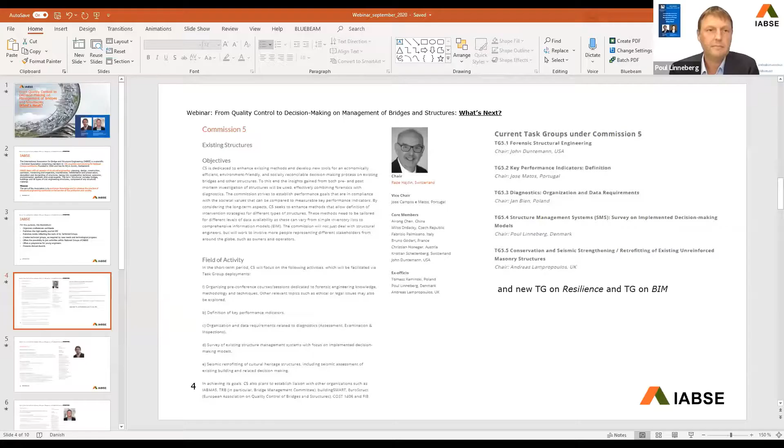So a few words about IABSE. It's an international association for bridge and structural engineering. It's a scientific and technical association comprising 100 countries and counting 56 national groups worldwide. It was founded in 1929 and has its headquarters in Zurich, Switzerland. IABSE deals with all aspects of structural engineering: planning, designing, construction, operation and monitoring, inspection, maintenance, rehabilitation and preservation, demolition and dismantling of structures, taking into consideration the technical, economical, environmental, aesthetic, and social aspects.

So it is the last items that we will talk about here today, about the management of bridges and structures. IABSE defines structures to include bridges, buildings, and all types of civil engineering structures. I'm sure Jose will also touch upon that in his presentation. IABSE's mission is to exchange knowledge and advance the practice of structural engineering worldwide, in the service of the profession and society.

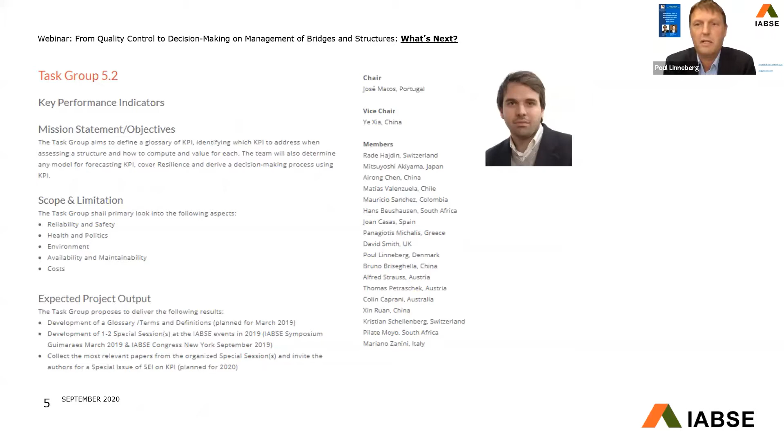José Matos will for sure give us a good introduction to this.

Then there's the fourth task group on the structural management system, where we do a survey on implemented best practice and also on promising research, and we will try to address if there's a gap and how to progress the industry from the latest knowledge within structural management systems and decision-making models. Then there's the fifth task group, on seismic strengthening and retrofitting of existing unreinforced masonry structures, headed by Andreas Lampropoulos.

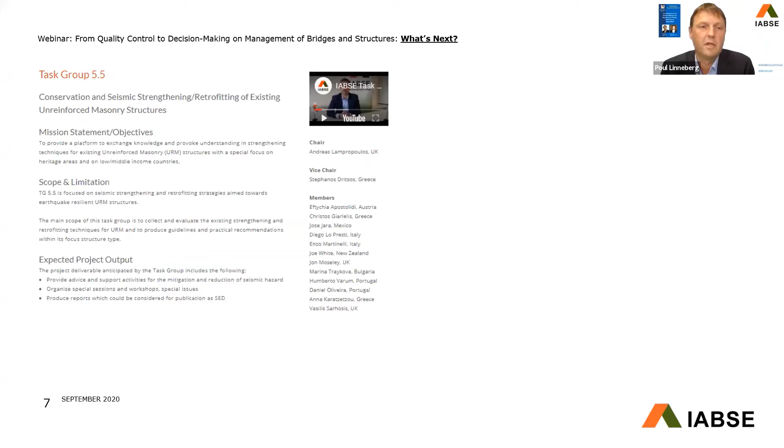He has made the first IABSE webinar, which is available on the IABSE webpage, in a section called e-learning, where you will see a great presentation with a Q&A session afterwards, where you can learn a lot about this subject.

Now today's speaker is Mr. José Matos from Portugal. I'll just give a brief bio of him. He received his PhD in civil engineering in 2013 in the field of probabilistic-based safety assessment of existing structures.

He has been teaching and supervising master's students and PhDs since 2007 at the School of Engineering at the University of Minho. He is a member of ISISE, the Institute for Sustainability and Innovation in Structural Engineering. His research fields are bridge engineering, asset management systems, life cycle cost, safety assessment, risk evaluation, and sustainability.

I guess all of our participants at today's webinar can see that these items are of interest to us. He is also a co-author of more than 100 publications in international conferences and journals. He participates in several international committees and coordinates international working groups. He is also involved in coordinating several international and national research and development funded projects.

He has been chair of COST Action TU1406 on quality control plans for roadway bridges, standardization at a European level, which has recently been completed. More recently, he was elected president of Eurostruct and is a vice president of IABSE.

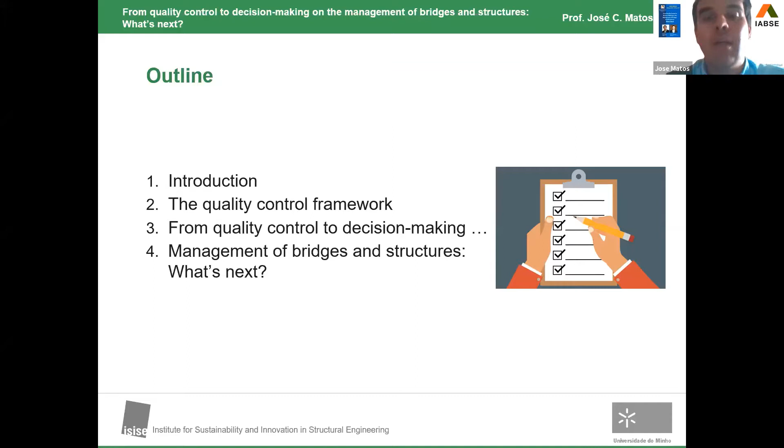So in engineering, quality control is related to systems development in order to ensure that the products or services meet or exceed the expectations and needs of users and the community. This is the definition of quality control.

And when we go to bridges and structures, we must say that asset management, which all of you are aware of, and quality control are two sides of the same coin. However, there is an increasing need to develop strategies in order to ensure the quality of the entire system, with the aim of reducing the risk of unexpected costs.

So that's the reason why we want to do better quality control, and in line with that, more efficient asset management.

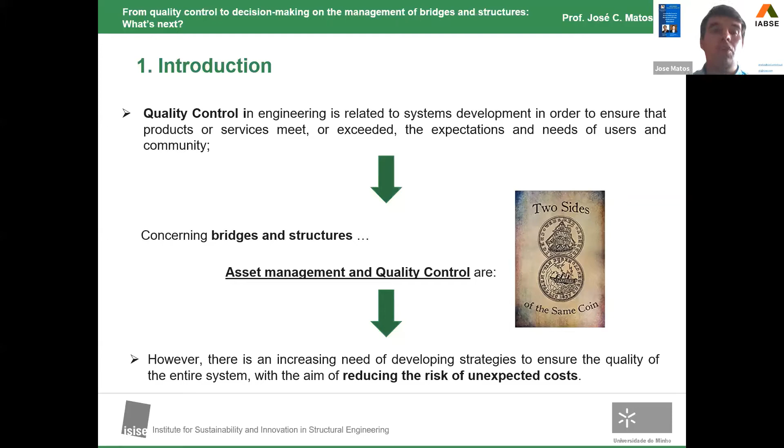We know today that many bridges and structures are approaching the end of their lifetime, and this makes these bridges and structures critical assets in order to ensure the mobility of people and goods. We all know, for instance, the situation of the bridge in Genoa, where the costs of the collapse were not just the direct costs of the collapse.

But also the cost of the impact on the economy and on the society during the period the bridge was unavailable for everybody. Also, some structures show a faster deterioration process, mainly due to poor design and construction, where the quality check during design and construction was not so good. These structures show faster deterioration, and this process is accelerated by external factors such as increased traffic loads, or natural or man-made hazards that our infrastructures face today.

So we need to establish maintenance actions in order to make those structures more efficient and with higher performance, at least during a longer period of time. And in order to do that, we need to take efficient decisions based on an optimized plan of interventions, and such interventions should be made in order to keep the structures as functional as possible.

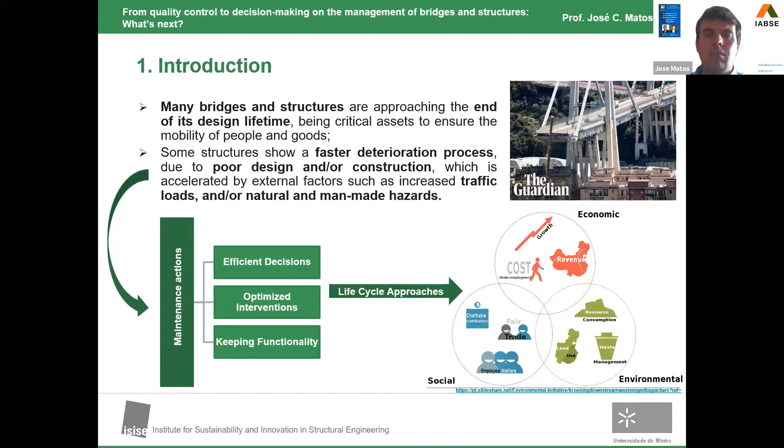So this enters into what we call the life cycle approach. In life cycle approaches, we need to take into account the economy of costs - the costs from the operation and use of these infrastructures. The social costs, because we have an impact due to the availability of the infrastructure on people and society, and also the environmental cost, which is something more recent, but we need to take this more and more into account.

So the definition of a holistic and integrated approach for life cycle management of bridges and structures becomes crucial. This approach should take into consideration condition inspection and monitoring, a good performance assessment and modeling, the interventions we need to implement, and also the standardization of best practices on the maintenance and management of those structures. Thus, there is a need for harmonization of different standards and codes into the definition of new guidelines for lifetime extension.

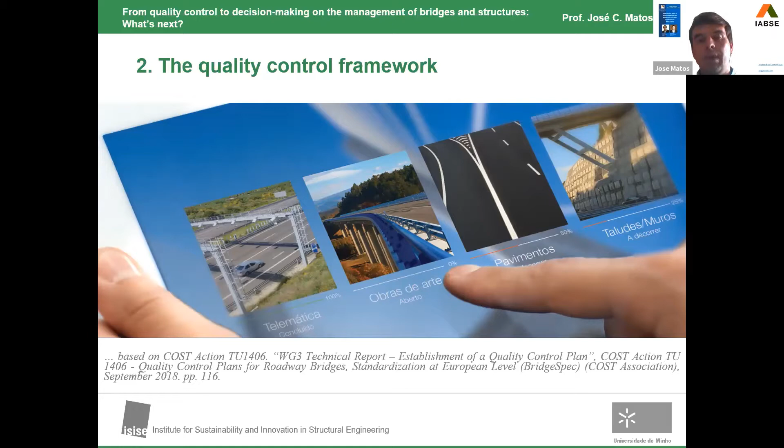Now, I'm going to give you an overview of what is a quality control framework that was decided and discussed within COST Action 1406, a cost action that was chaired by myself, but with collaboration from colleagues from all over Europe. You can go to the website of this action, and there you're going to have much more information about the framework and the quality control framework that we developed and proposed during this action.

So as I said, we know that we need to assess bridges. This assessment is mostly made through visual inspection procedures. We all know that. In some occasions, we use NDT tests, and in some specific situations, we can implement monitoring systems, permanent or temporary. The good thing is that all of these give us an indicator of the performance of our bridges, of our infrastructures, during their lifetime.

Of course, most of these indicators are visual based, so very subjective and depending on the technician doing the inspection. But more and more we are starting to have indicators which are more objective and based on or obtained through more efficient techniques such as NDT or monitoring.

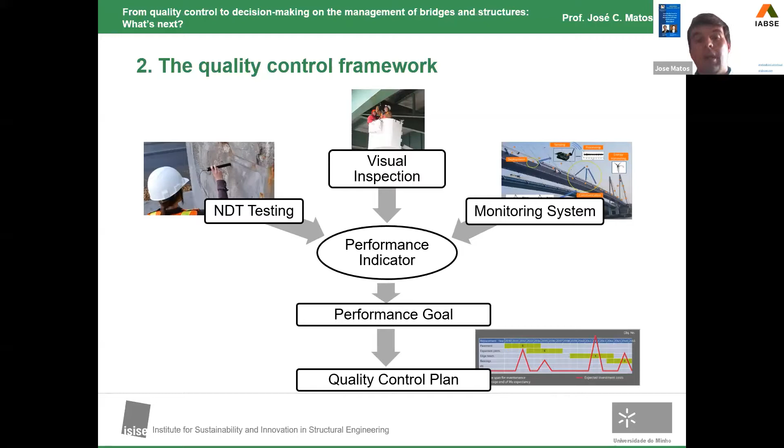Then, based on these indicators, we need to check if the infrastructure, if the bridge, is accomplishing or not the goals for which it was designed - so it is or it is not. This checking, whether it is or isn't accomplishing the goals, is made through a quality control plan, and this checking should be developed during the whole lifetime of the bridge.

So what is a performance indicator? This is a very important definition because performance indicator is the base of everything. It's something that you can measure or quantify, a parameter related in this case to the bridge performance, but it can be related to any kind of structure performance, that can be compared with a target measure or a performance goal, or can be used also for ranking purposes.

If we have a stock of bridges or similar structures, we can establish ranking and take decisions based on performance indicators. This is done under a quality control plan or a life cycle management procedure.

So you have here in this image below an explanation of performance indicators that we may obtain for each bridge, for each structure, and also a connection between these indicators and the goals that we want to achieve for each bridge.

The goals should be to minimize the owner cost, minimize the user delay costs, or in other words maximize the availability of our bridge, minimize the environmental costs and impact, and keep our bridge and our network safe for the users and reliable as it is.

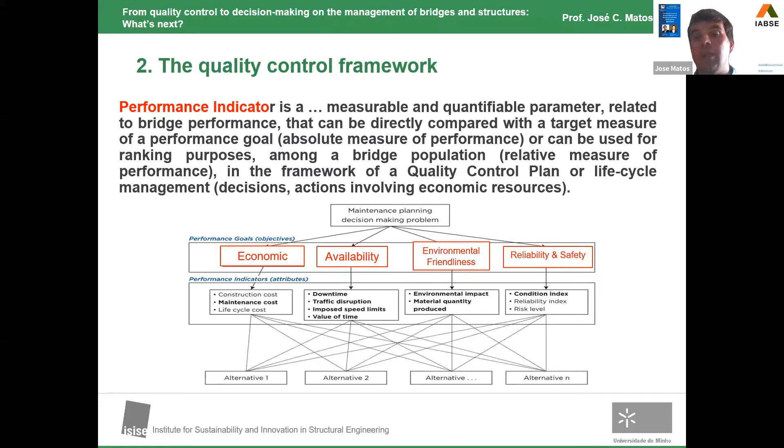We identified economic, availability, environmental friendliness, and reliability and safety as the most important ones in this case for bridge structures. These are the KPIs, the key performance indicators that came from the Dutch RAMSSHEEP approach.

And we decided during this cost action, as I told before, that for bridges those key performance indicators indicated in red color are those that are really relevant for the decision-making procedure.

And those that are in red color include the reliability. When we speak about reliability, I believe all of you are aware, at least those from the structural engineering side, that reliability is directly related with the safety or the serviceability of the structure. So it's something directly connected to the structure itself.

Then we have the availability. The availability is connected to the operation of this structure, how this bridge is available or not to the traffic. Is it in operation for the users or not? This is the concept of the availability KPI.

Economic, we all know what is economic. It's the costs that we have with interventions and the maintenance of our bridges. These are the economics KPI.

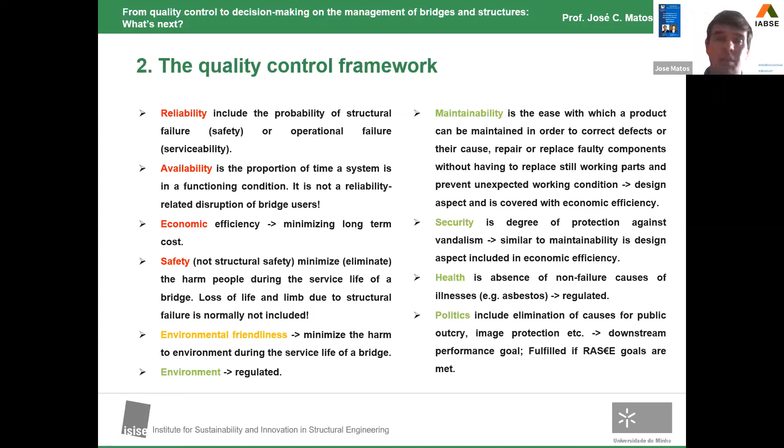So we kept these four KPIs that will allow us to take decisions on the best alternatives, the best scenarios for interventions on our bridge stock: reliability, availability, safety, and economics.

And we can split these KPIs into two big groups. The first one is what we call static quality control, or snapshot. Why do we put reliability and safety there? Because if we go today to any bridge, we can evaluate the reliability of the bridge in terms of safety or serviceability and ultimate limit states.

So we define the performance limit states and we can evaluate and assess the reliability today, and also we can assess the safety of the bridge today to the users. This is something you can do today if you go to any bridge site.

Other KPIs we group as the dynamic quality control, because costs and availability depend on two things: the forecasts of reliability and safety, connected with the degradation or deterioration model we implement to do these forecasts, and also the strategies of interventions we want to implement on our bridges. Some strategies will have higher costs or higher availability, others will have less costs or less availability.

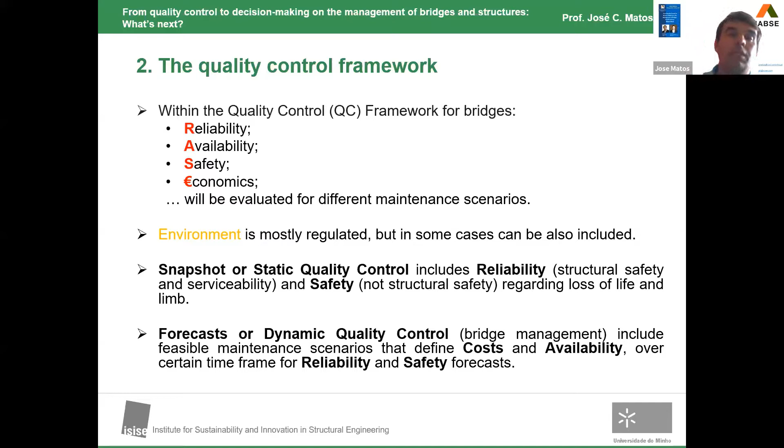With this quality control framework, we can connect the damage process governing the deterioration of our bridges with the performance indicators that give us information about the bridge's performance. This comes from observations directly on the bridge, but also from other data. Once you have this indicator, we have a value obtained with visual inspection, NDT, or monitoring, and we can connect this value with the KPIs.

In this case, safety, reliability, availability, and costs are the KPIs that will allow us to make decisions. So we can get these values for each element of the bridge, for each bridge type - girder, arch, or frame bridge - and for each level of analysis, whether a component like a bearing device, a bridge system, or a network of bridges. This is somehow the procedure I explained before.

So we split the KPIs into two levels, the reliability and safety KPIs, then we assess the bridge and calculate these two KPIs. Based on the scenarios we have, we can target different KPIs in terms of availability and costs, but also project reliability and safety over time. So we have a multi-criteria, multi-objective decision-making process where we want to check the optimal scenario in terms of interventions, taking into account the lifetime of the bridge or period of analysis, and the KPIs: reliability, availability, economy, and safety.

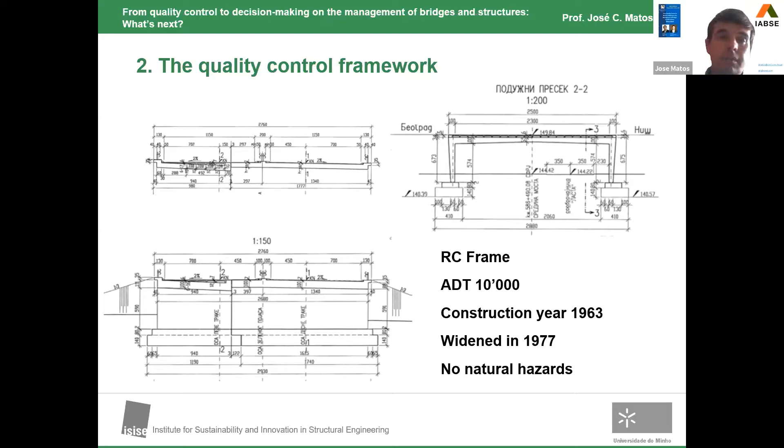This bridge was built in 1963 and later widened in 1977. From the design checks and information, there was no particular weakness identified in the design, so no human errors. There is an obvious weakness on the connection between the old and new part of the bridge, and no identified problem on the materials. There was indeed an identified increase in traffic demand from 63 to 77.

That's the reason why we recalculate what we call the prior or virgin reliability index, which is the reliability index of the bridge without any damage. We recalculate it for the new traffic load, and the value we got was 3.8.

Also, in order to do that, we need to identify the governing collapse mechanism - the two main mechanisms that can put the bridge into collapse in terms of ultimate limit state. We identify a bending and a shear collapse mechanism, and consequently we identify what we call the vulnerable zones, or the zones critical for this bridge.

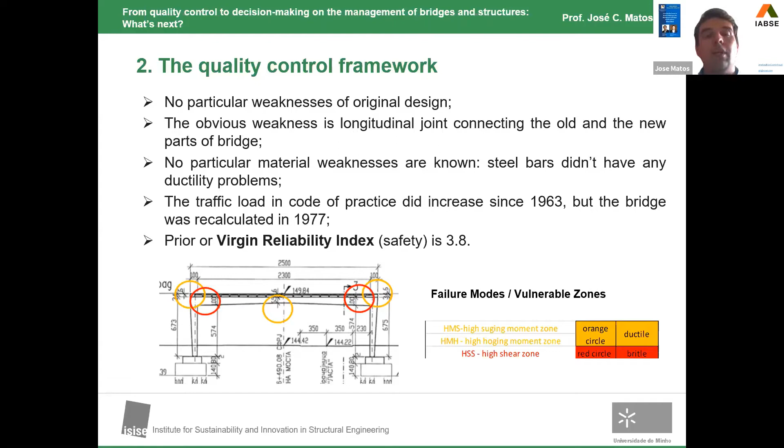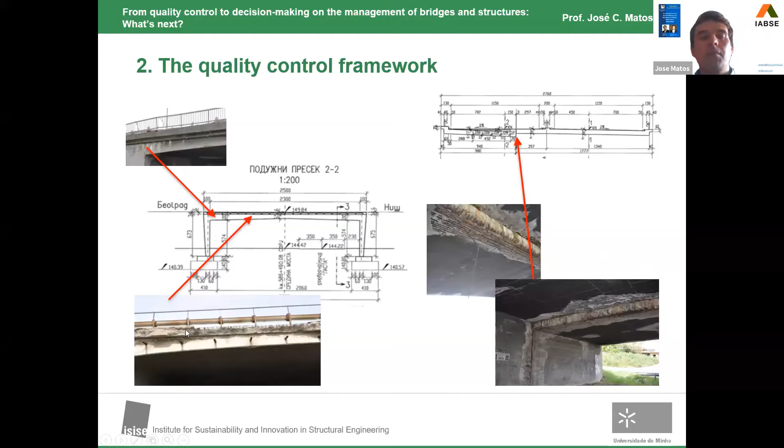So after analyzing the drawings, we came to the bridge inspection and identified some pathologies along with the location where these pathologies were checked. We are speaking about diagonal cracks in an abutment, some corrosion in the conjunction area between the old and new part of the bridge, and some spalling and corrosion in the deck.

According to the information from the inspection: spalling at a width of 1.5 meters over the whole span, some significant corrosion on the old structure, some corrosion in the new structure but in the vulnerable zones, probably some corrosion over the piers based not on what we see but on symptoms we get from the inspection, and also this diagonal crack due to shear.

This is the sketch that we get from the inspection that we made from the bridge. Based on experience and some elementary statics, we may say that a resistance reduction of around 10%, probably due to this significant corrosion that was identified, is happening.

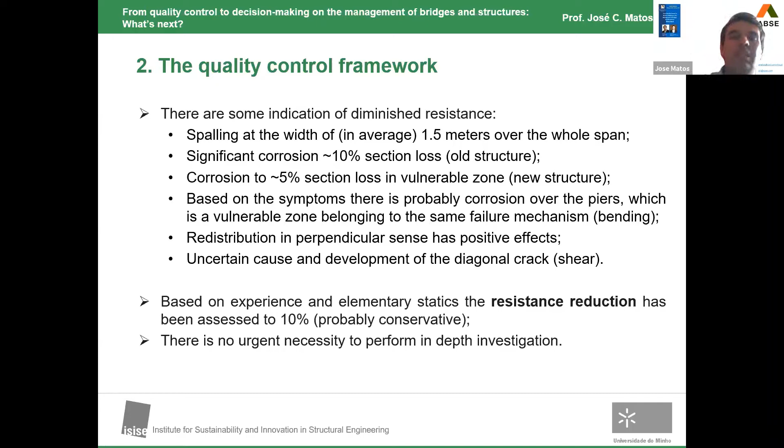So we can also establish different scales for reliability, in terms of ultimate or serviceability limit states. This scale is from 1 to 5. 1 means that the bridge is in a very good shape and 5 is a very bad shape.

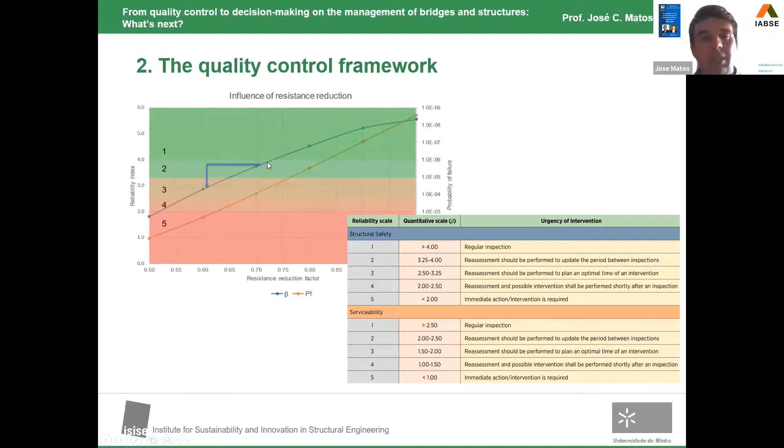Since here we are speaking on ultimate limit states, we can use this first scale, based on the collapse mechanism of the bridge. Based on these values given to us from the codes, from Eurocode and others, we can establish these 5 scales. Based on these 5 scales, we may say that initially our reliability was of 2, and then after this resistance reduction, we get a reliability KPI of 3.

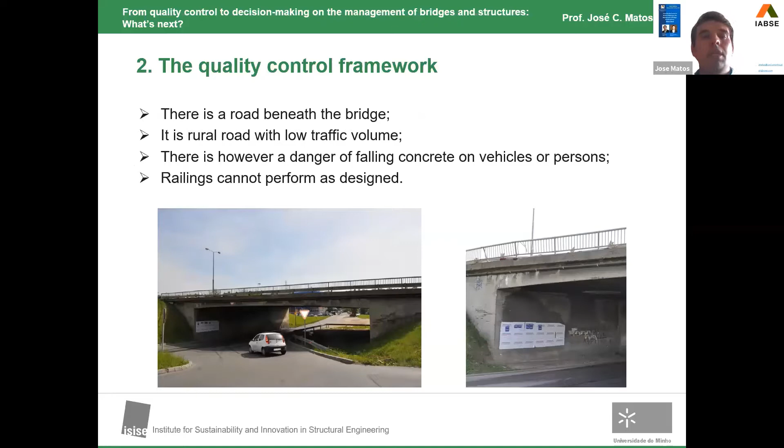We can evaluate also on the same inspection the safety KPI of the bridge, and in this case, based on what we saw, there was some cover that could have an impact on vehicles, but the probability of large chunks falling down is not so high. Although we identified that this can happen due to spalling, there was also some damaged railings that could jeopardize traffic safety.

Based on that, we also took these tables into consideration from 1 to 5, and we give a KPI value for the safety KPI of 2, which means injury return period of 75 years, or in other words, that it's very unlikely that a person could get injured because of current bridge performance.

So then we can pick this framework that I already showed you before, and based on this framework, we can establish the bridge type. We can pick the bridge element that we are analyzing, take the information about what material this element is made of, the year of construction, and the collapse mechanism connected to each element.

So if it is a bending or a shear collapse mechanism, which are the 2 main mechanisms in terms of ultimate limit states, and then in terms of safety KPI, we can evaluate the falling of chunks from the deck or the damage on the railings.

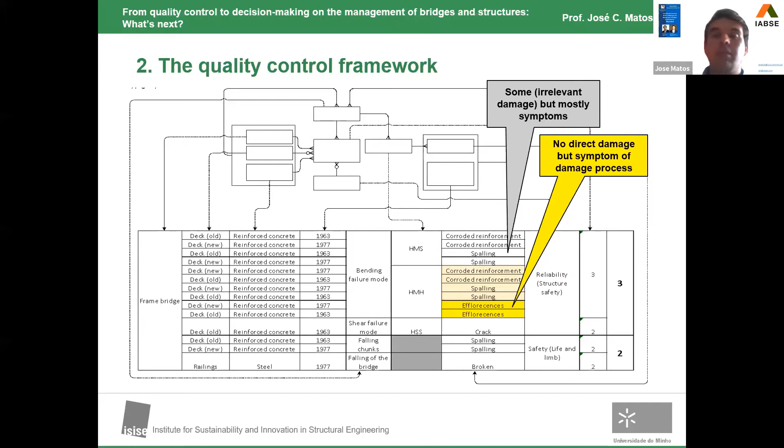And the same for the safety: we evaluate the spalling and the broken railings, the 2 situations. 2 is the worst one, so we took 2 for the safety KPI.

But we need also to address later the component of time. Time is a projection based on the material degradation durability. And we can do this projection for 15 years or more, which is the number of years that the reliability KPI or the safety KPI will be maintained at 3 or at 2.

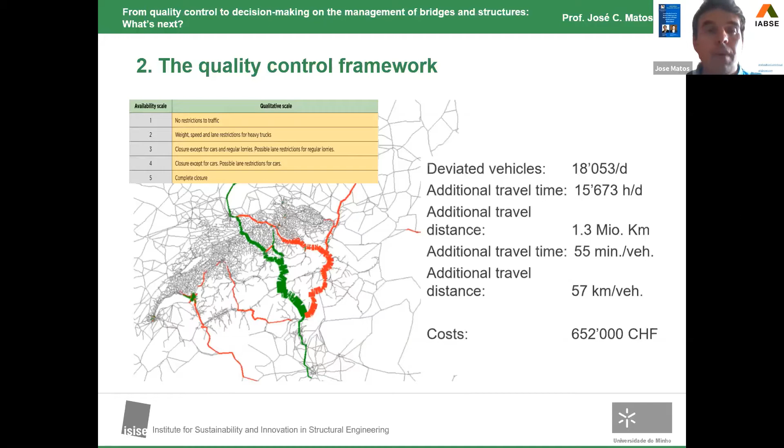In terms of economic and availability, these are the other 2 KPIs that we need to take into consideration in the quality control framework, based on the scenarios that we need to address. We can classify the availability from 1 to 5 according to these tables, and the same for the costs. All classical bridge management systems have this cost information: unit costs, mobilization costs, and maintenance intervention costs. So all this information is there, and based on that, we can calculate the costs.

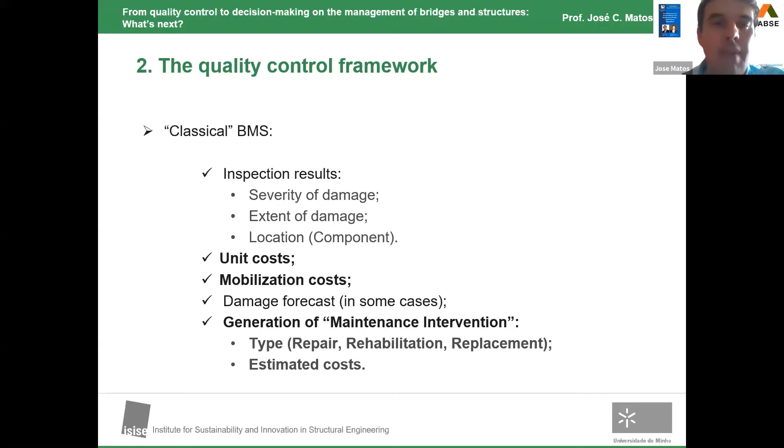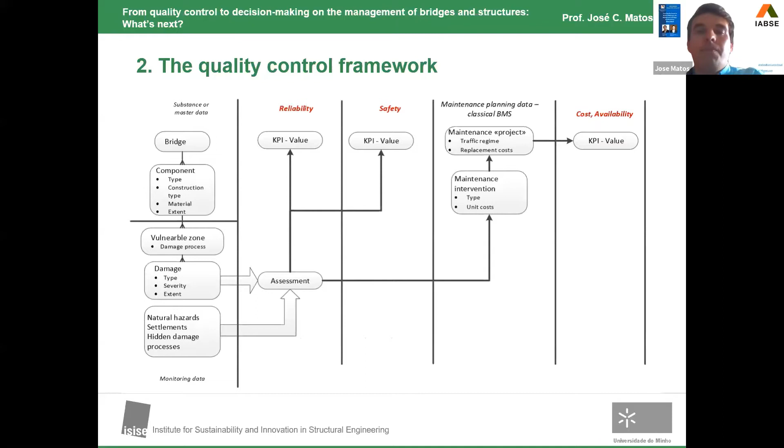I'm going to further let you know how we will transform these costs also into a grading from 1 to 5. So this is a resume of the reliability and safety KPIs that come from the assessment. Then we do the projections, the scenarios of interventions, and then we have different cost and availability KPIs according to the maintenance strategies that we are going to implement.

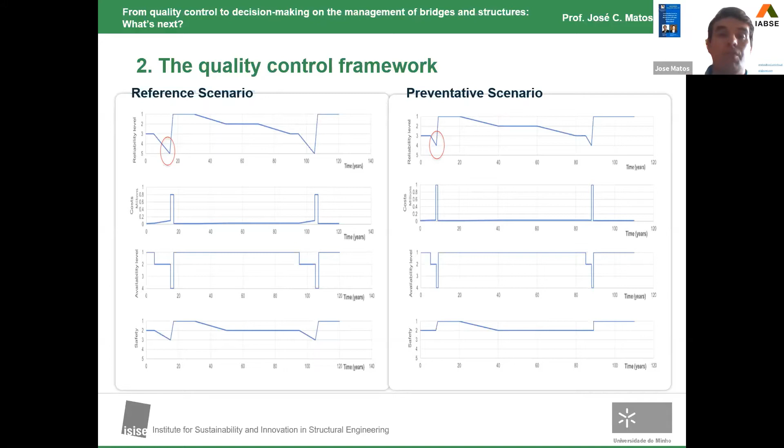The grading for reliability, availability, and safety is from 1 to 5, while the costs we have in absolute terms, in million euros. Later I'm going to show that we are converting these costs also into the same grading from 1 to 5. So in this case, all KPIs are expressed on a scale from 1 to 5, where 1 is the best and 5 is the worst.

The costs can range from 0 to the highest cost, which is to build a new bridge. If there is no cost, the grade is 1. If it's the highest cost to build a new bridge or rebuild, we express a grading of 5. This way we can draw these 3D plots where, for the same grading from 1 to 5 and for the 4 KPIs - safety, availability, reliability, and cost - and for the 2 scenarios, the reference scenario and preventative scenario of maintenance interventions, we can draw these 3D plots.

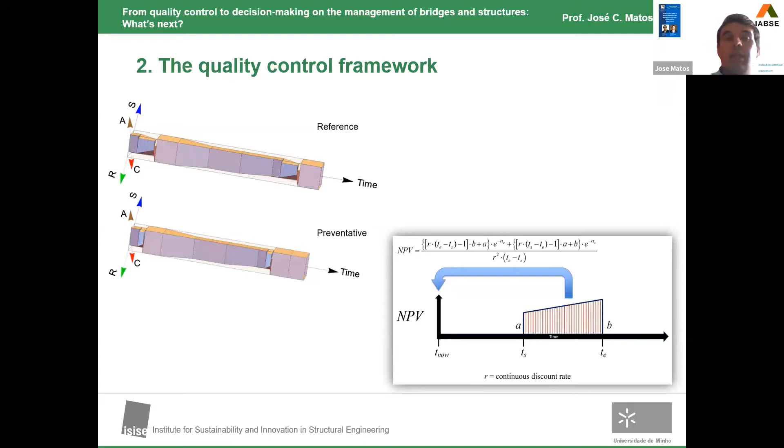But these 3D plots are very complex and very difficult for us to take decisions from. So what we do is implement the net present value theory in order to convert these KPIs from 1 to 5 into today's values. We need the cumulative values in the lifetime analysis to take the decision for us today. So we use the same scale from 1 to 5, and we need to reduce the KPIs to the same scale at any time instance through the net present value theory. We divide by the net present value, which is calculated as if all KPIs were 1 over the whole investigation period. So we divide the scenarios we have by another scenario with all KPIs at a value of 1 during the whole time period of analysis.

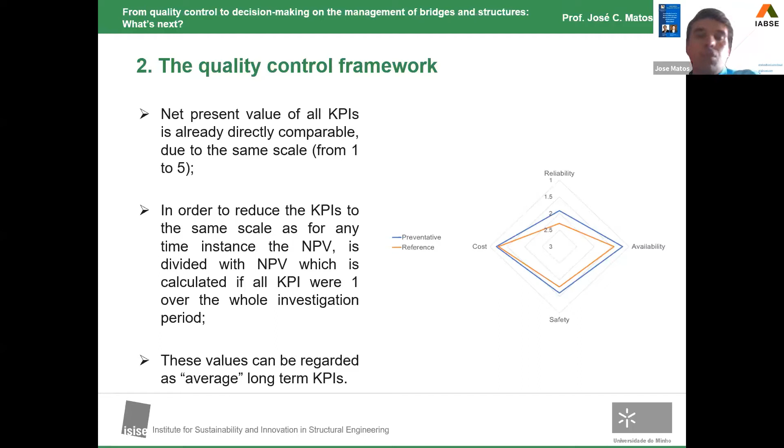This way we can calculate these two plots for today, taking into account the net present value theory, and we can compare directly for today the reference with the preventative scenario. The scenario that has a larger area, which is closer to KPI values of 1, is the best scenario to choose. So in this case, the preventative scenario is the one that should be chosen over the reference one.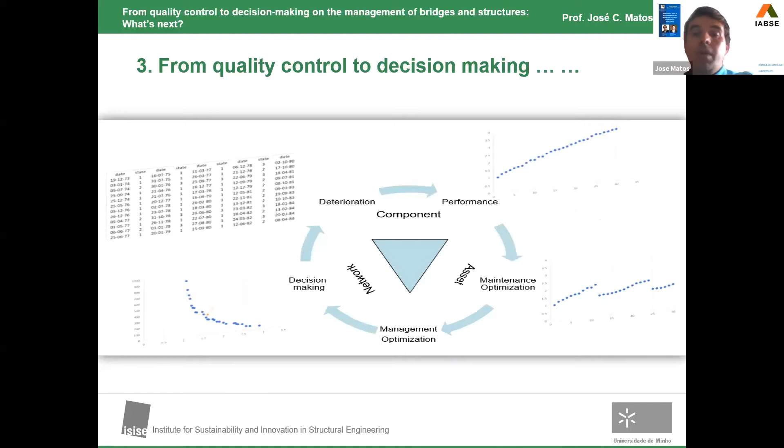Now I'm going to speak a bit about quality control. Decision making is part of this framework, but I also want to integrate it at an asset management level. So at an asset management level, we have the database, the performance prediction, we need scenarios, and then we need to take decisions.

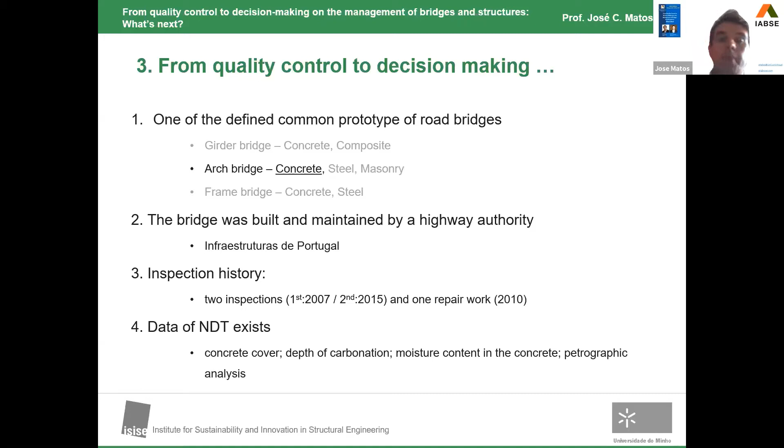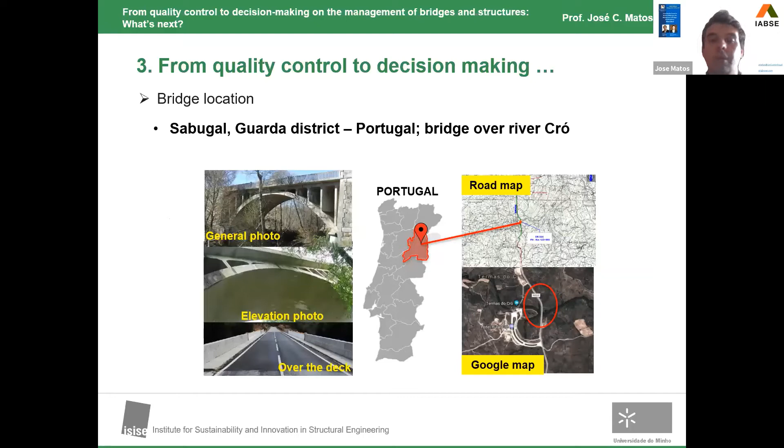Here is a simple example of a bridge in Portugal. It's an arch bridge belonging to Infraestruturas de Portugal. It has 2 inspections in the past and 1 repair work that was done in 2010, and there are some NDT tests. This is the location of the bridge in the interior of Portugal. It's an arch concrete bridge.

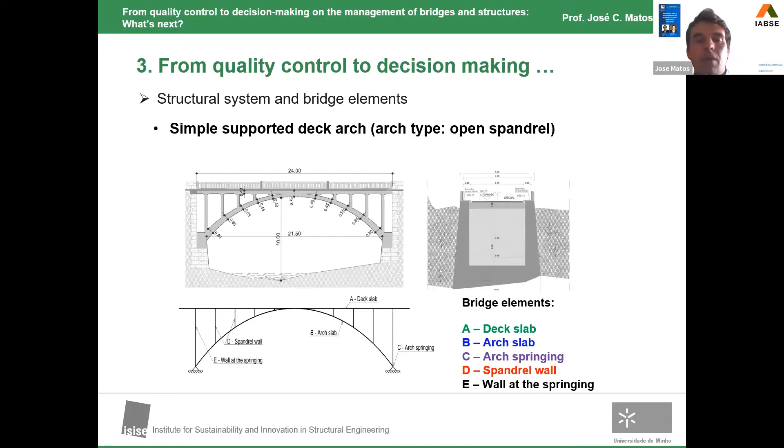It is, as I said, a simply supported deck arch bridge, and you can see here the main elements of the bridge: the deck slab, the arch springing, the spandrel wall, and the wall at the springing. These are the main elements of this bridge.

And then we can identify the defects based on inspections. We did the inspection of the bridge, and based on that, we identified some hairline cracks, some leaching, some wet spots, and we also correlated the place where this was identified with the location and the element where these pathologies were identified.

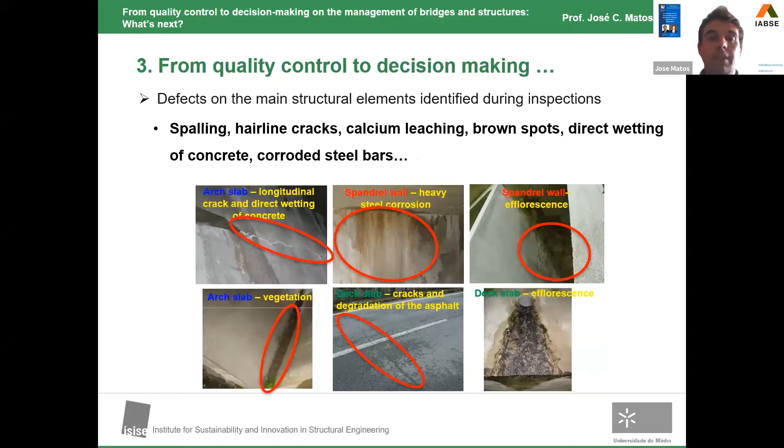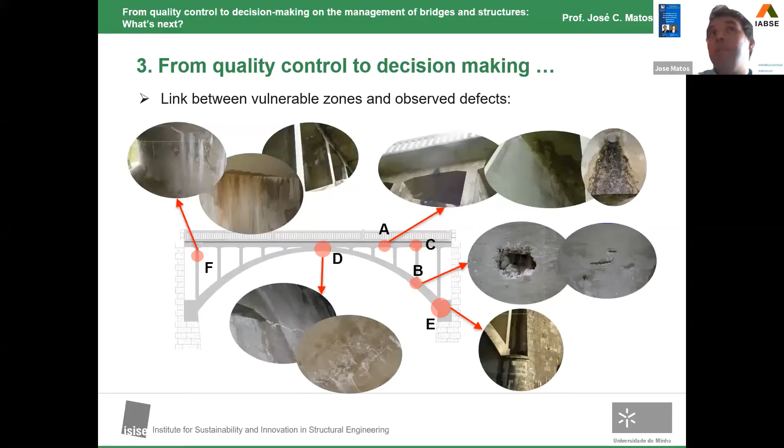And what is the mechanism, the limit state function that is connected with each pathology - is this pathology reducing the resistance part of any of these limit state functions that we have, bending, compression, or deflection, or not? This comes with the protocol, with the quality control framework procedure that I already told you. We do an analysis for bending, for compression, and also I'm including here the safety KPI.

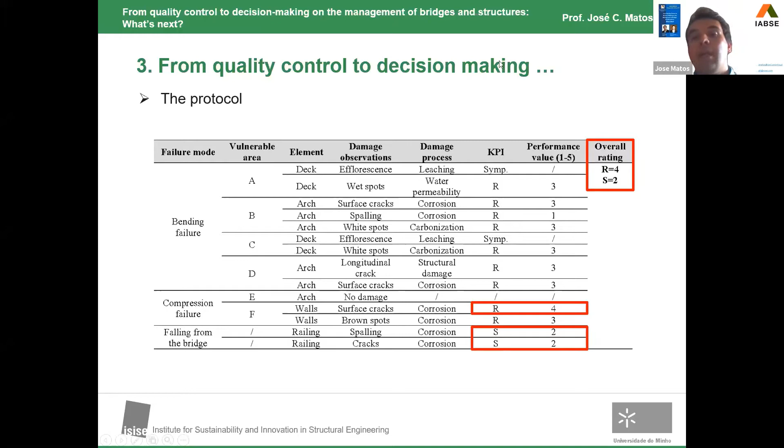You can see here with S, the last two lines. So from the first lines, we have bending and compression failure. And from all the possibilities and all the pathologies and so on, we identified that the most critical is the corrosion that is happening on the walls, connected with a compression failure mechanism. And then we pick up the reliability of 4. And for the safety, we do the same analysis and pick up a safety of 2.

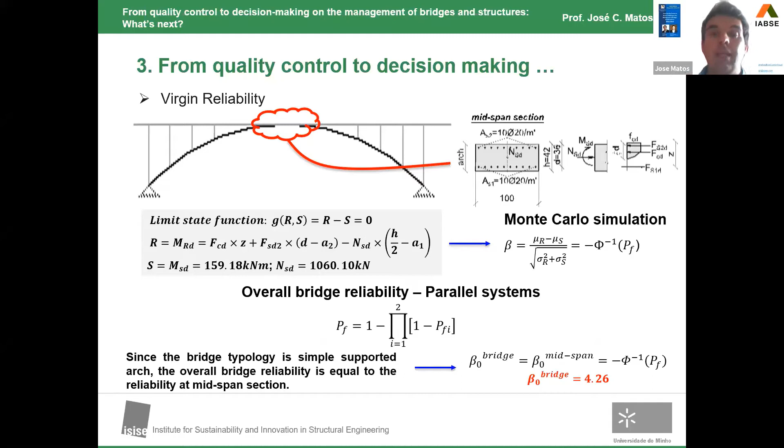But we can go further. We can calculate also the virgin reliability. In this case, the virgin reliability is a reliability without any damage or pathology. In this case, we obtain a value of 4.26.

And then, using the same plots, we can estimate the reduction on the resistance due to the inspection and our experience. We identify a reduction of around 8%. And this means, taking into account these plots, that our initial beta today from this inspection is 4.17.

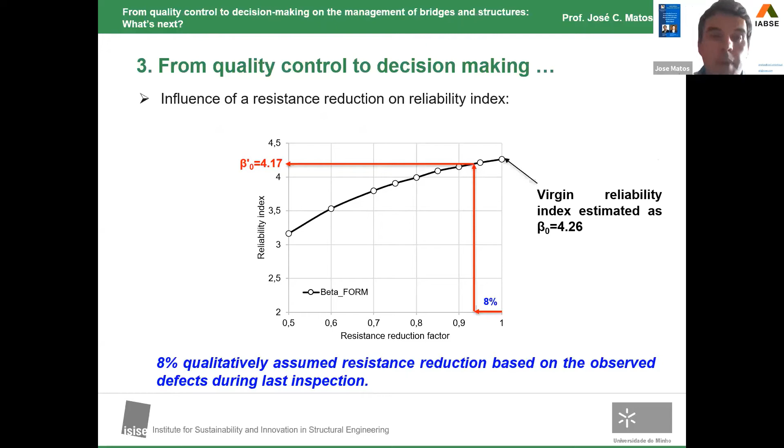Then we can implement different scenarios, different strategies. In this case, I'm giving you a more analytical procedure for these strategies. One strategy that we assume here as the reference strategy is the no maintenance strategy, but we incorporate also two more, one preventative and one corrective strategy. And also we use this degradation model, this analytical model, for estimating the reliability evolution with time.

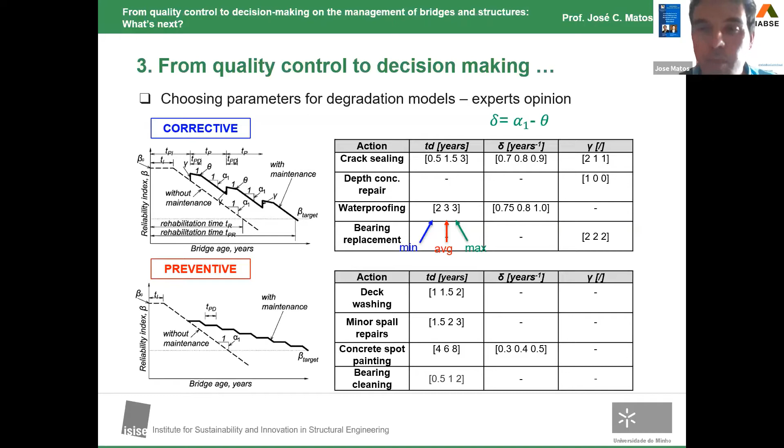So based on these two strategies, preventative or corrective, because the first one, the do-nothing, is without any maintenance activity, we split the corrective into corrective actions such as crack sealing, waterproofing, and so on, and we need to include here the effects of each action. Similarly, we include the preventative actions and their effects, which can be a delay on the degradation, a reduction on the degradation rate, or an immediate improvement on the performance, on the reliability of our bridge.

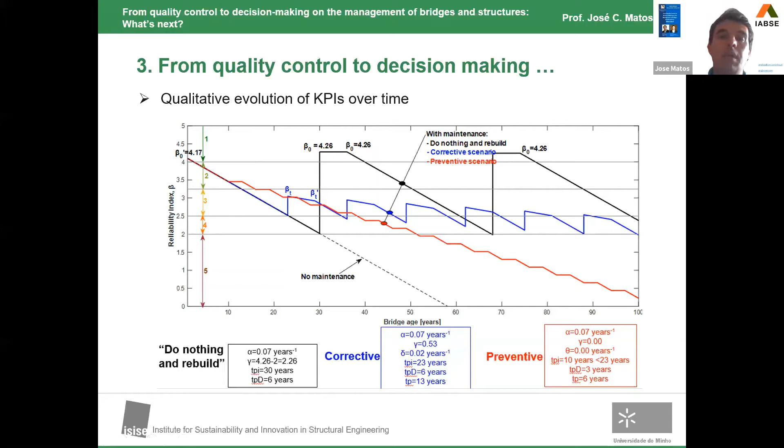And then we have also the preventative and the corrective scenarios. We establish these grades from 1 to 5 that I already showed you in the table for this collapse mechanism, and we can draw up these scenarios for the lifetime analysis of the bridge. Once you have these scenarios from 1 to 5, for each scenario we have different costs. Of course, on a do-nothing scenario, we need to build up a new bridge, so we achieve the maximum cost, which is to build a new bridge, giving us a KPI of 5.

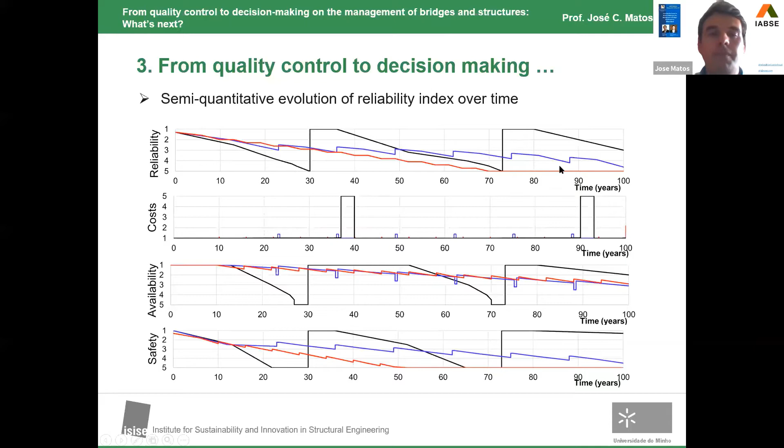But also we have the availability scenarios for each do-nothing, preventative or corrective scenarios, and also we have the safety KPI scenarios. Using the same procedure, net present value theory, we can convert each grade from 1 to 5 into one value, taking into account the interest rate and the discount factor. From this analysis, we conclude that the corrective maintenance scenario is the right one.

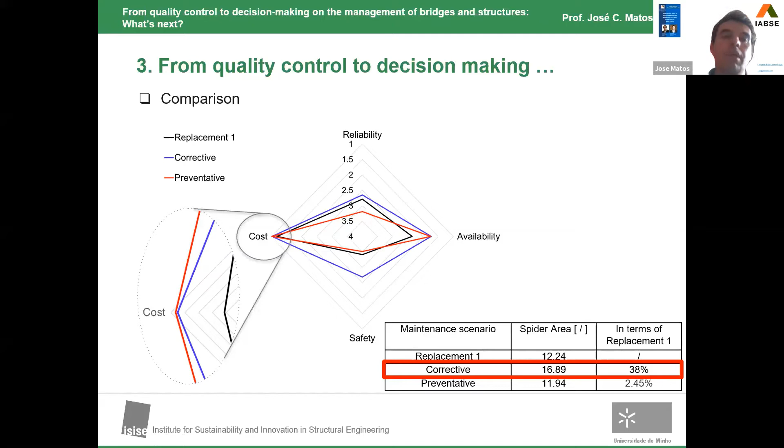So I'm reaching the last part of my talk. We did a very good work. We implemented a framework for KPIs. We bridge the gap between inspectors doing inspection and taking values for the performance indicators, and the technology, the NDTs and the monitoring that are taking these values, with the decision makers who establish the goals and take into account the KPIs that define the best strategies.

We also did another check in this same study: how many systems include predictive models and optimization models to give us the best decision support in terms of maintenance strategies. A lot of them already have deterioration models and optimization models, but these deterioration predictive models are either deterministic analytical, or Markov based. Still, nowadays we can say that there are models which are more reliable than these ones.

The other thing is with respect to optimization. The optimization is done by these systems in a very simple approach. They are not using too complex global optimization algorithms or whatever, they are using simplex methods and so on. So there are still some tools that can be used and implemented in the optimization procedure.

Finally, another point: what is also missing here from this analysis? Some of the systems are web-based, some already integrate GIS, some use big data analytics. But if you speak about BIM, virtual reality, augmented reality, and automatic connection with drones, only a few are using this. So what is needed?

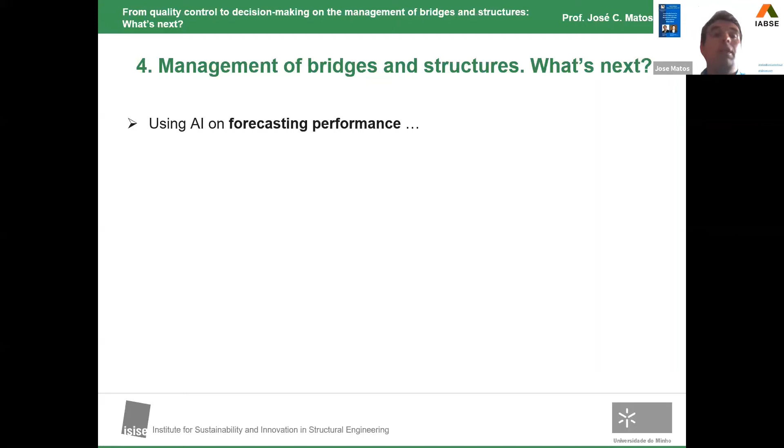What is needed is to use better forecasting performance models, maybe using artificial intelligence tools for that. We need to incorporate extreme events, natural and man-made, into decision-making and management, and I'm going to explain a bit how we should do that. We need to use novel decision supporting systems by implementing global optimization algorithms that can give, in a very short time, the most suitable and most efficient decisions. We need to use BIM definitely for the efficient management of our structures.

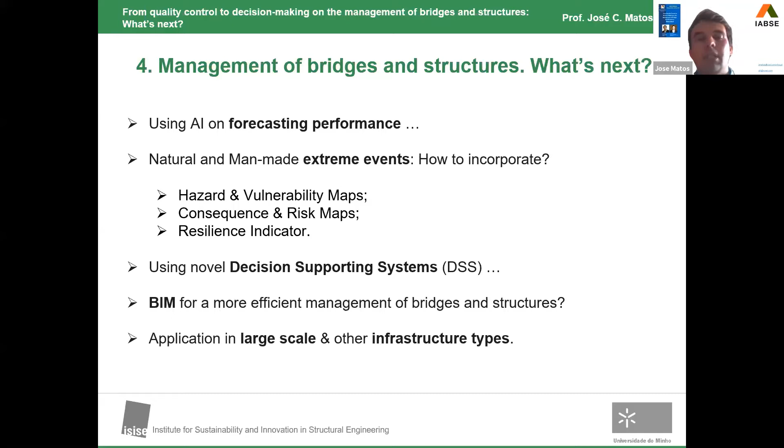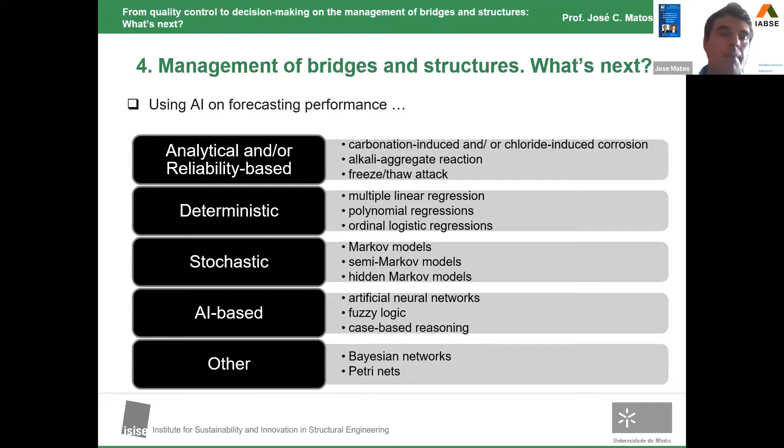And also we need to go from the small scale to the larger scale, and also apply it to other infrastructure types. So if we go to forecasting performance, we have many models being used. Some or most of them are deterministic, those used by current management systems, and some are based on Markov models. Nowadays, there are other models that give us results with more accuracy.

Here is an example of some studies we did with data from many bridges all over the world, in this case based on the NBI database, but we did it with many other databases too. The good fact is that if you take into account the accuracy factor, artificial neural networks, which is an artificial intelligence tool, gives us the best and most accurate results. If you take a look, the traditional Markov also is not the best one - the hidden Markov gives even better results than the traditional Markov. The main reason for that is that most of the databases are incomplete or don't have enough data, and the Markov doesn't work so well.

So in this case, the artificial networks is giving much better results, and this is something that should be for the future and for what's next.

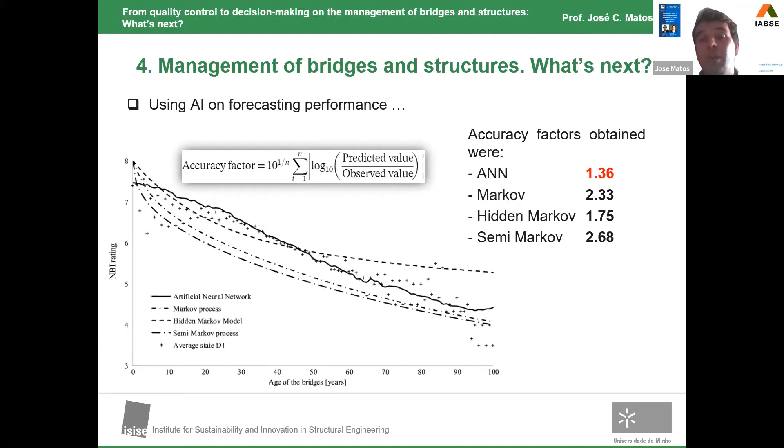The other point is how to include extreme events, and this is some studies also that we made. In this case, we developed under a European project, Horizon 2020 project called Safeway.

We developed what we call hazard maps, that give us the dominant hazard that causes the highest transportation infrastructure exposure in each region. Most of the transportation infrastructure, almost 40%, is affected by surface flooding, and 34% is affected by river flooding. Other natural hazards have very low effect, so the most critical effect for transportation infrastructures is flooding.

Also, we developed vulnerability maps that place the exact, precise location of the sites where people, natural environment, or property are at risk due to some catastrophic event.

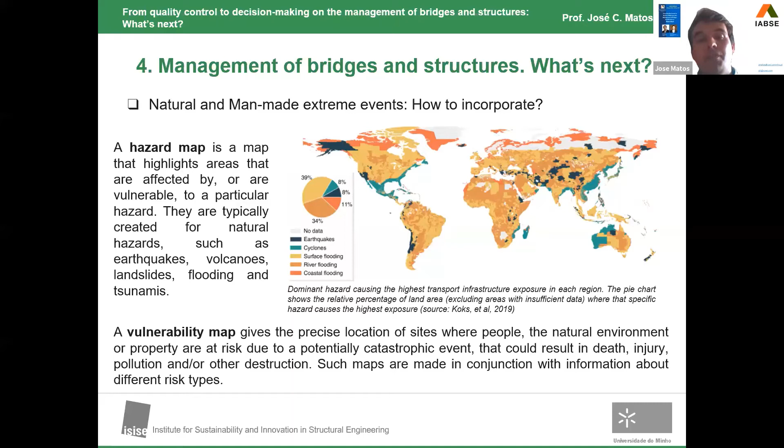And based on these vulnerability maps, we can convert them later on into what we call the risk type maps. So this is the risk maps that we also develop, and we came from a larger scale to a more reduced scale.

Here is some information about projected changes in the frequency of adverse weather events, natural extreme events for the transportation infrastructure. You can see that for each region we have some events like flooding or droughts that affect more the transportation infrastructures.

But then you need to do a small scale analysis. This is the hazard maps, the consequence maps, and combining hazard and consequence, the risk maps for flood for a region of analysis here in Portugal of a transportation infrastructure.

Once we have these maps, we can identify the most important and relevant extreme events that can happen during the lifetime of our transportation infrastructure, of our bridges, of our tunnels, of our slopes. So how can we proceed, or what should be the next steps?

We need to combine the aging that is given by our damage forecasting process, by our deterioration process, with the extreme events that will happen with a probability of occurrence that we need to identify. And also we need to incorporate here the resilience models.

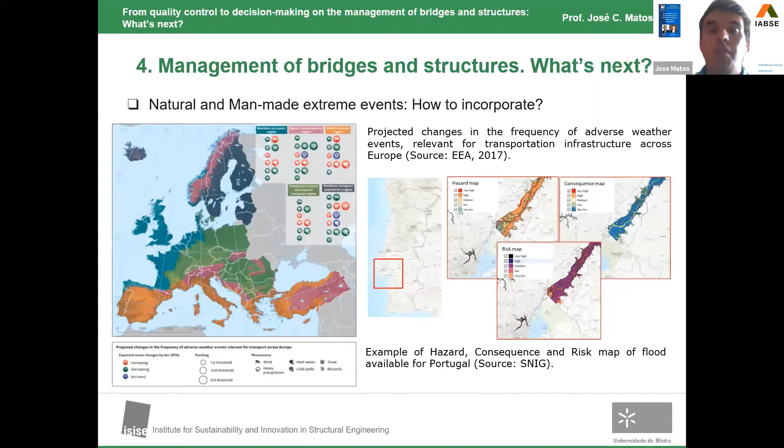We will not speak about interventions, we will speak about risk mitigation measures that will contain the risk of aging, but also the risk of any of these extreme events. So we can combine the two in the same lifetime period, and this is something that should be in the future.

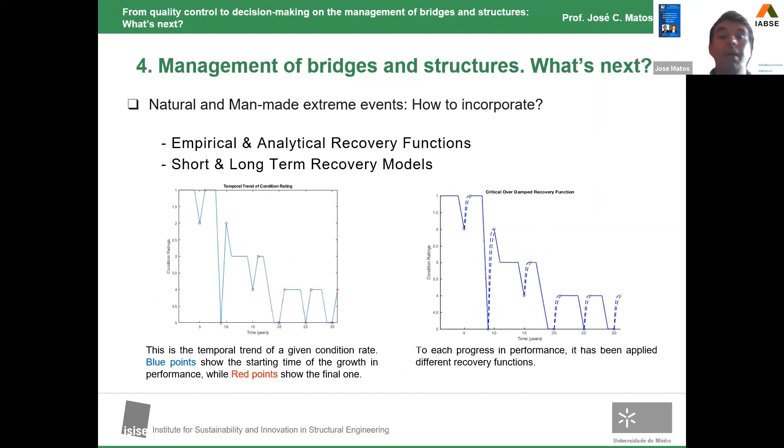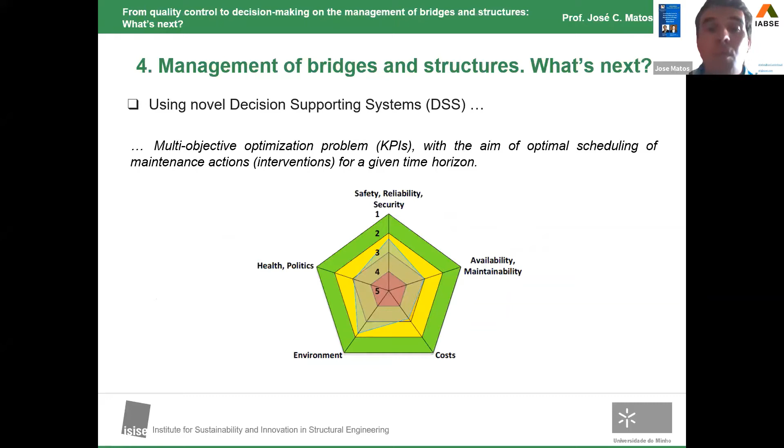For this, we need to define good models, good optimization models, and we need to use good or strong algorithms. In this case, we have an example of an evolutionary algorithm that was used with a stock of pre-stressed concrete bridges in order to identify the best strategy in terms of performance, in terms of costs, or in between.

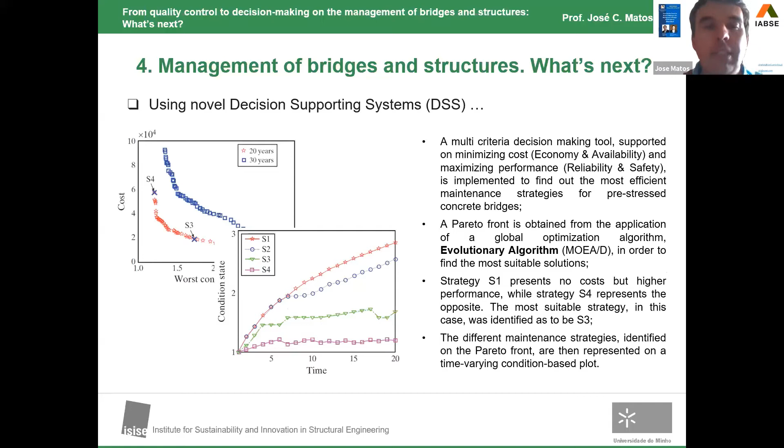And these algorithms, these evolutionary algorithms or others, should be implemented to support the owners to take fast and efficient decisions. Then I spoke about using technology. This is missing in many infrastructure.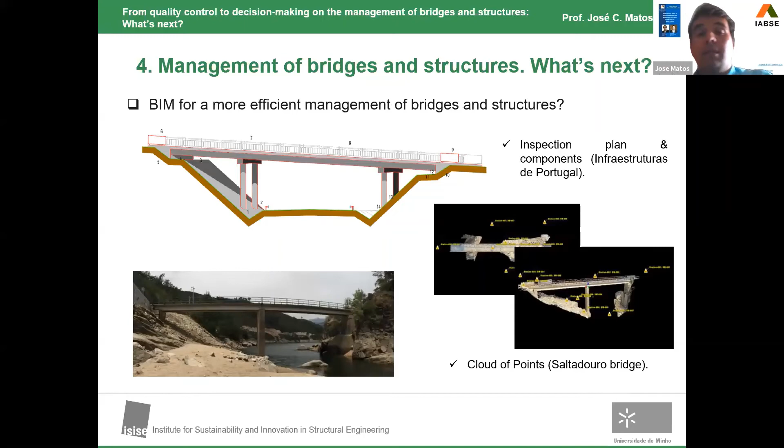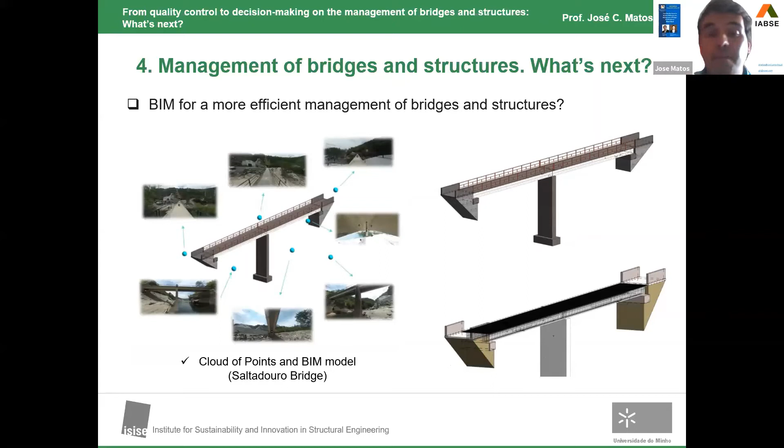But it's a need, and this is some work that we did. We implement the BIM and convert cloud of points and all the information that we get from on site into a geometry, and then we include the reinforcement, the pre-stress, and the reinforcement on the BIM model. This is something that I imagine all of you already did, or some of you.

But then also we identify the pathologies with different techniques, visual inspection, NDT, and so on. And we match each pathology, so the shared parameters and the parameter type we matched using IFC files to the BIM model. Using semantic enrichment and so on, we match it. And this way we can say that in this point, in this location, this vulnerable zone and so on, we have corrosion, we have a crack, we have a whatever.

And with that, we can recalculate the reliability KPI, and instead of having an estimation of a resistance reduction, we can automatically calculate the resistance reduction and reliability KPI, the exact KPI for our bridge.

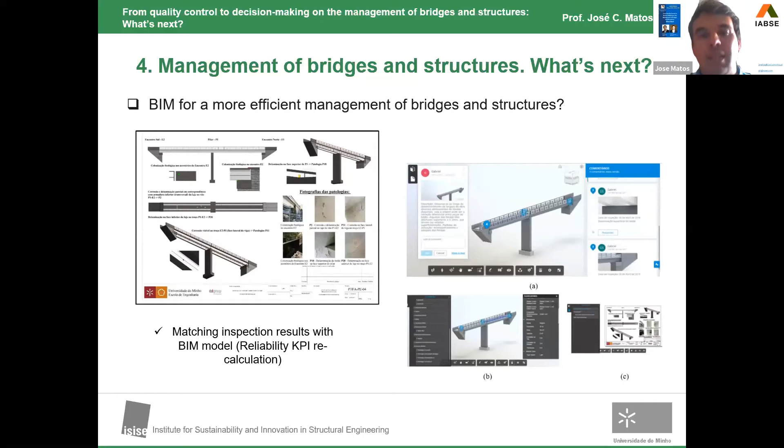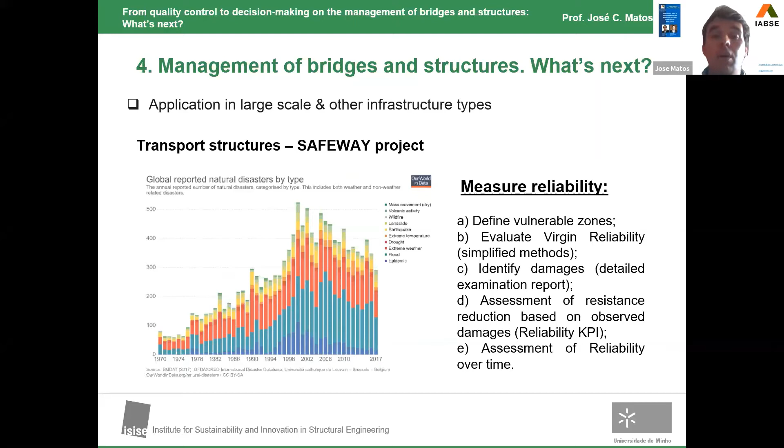In this case, since we are speaking about a huge amount of bridges, we need to use simplified methods to compute the virgin reliability, and also we need to use simplified methods for developing the predictive modeling or the reliability evaluation with time. This is an example of a very simple bridge, a simplified scheme of the bridge, and how reliability evolves with time.

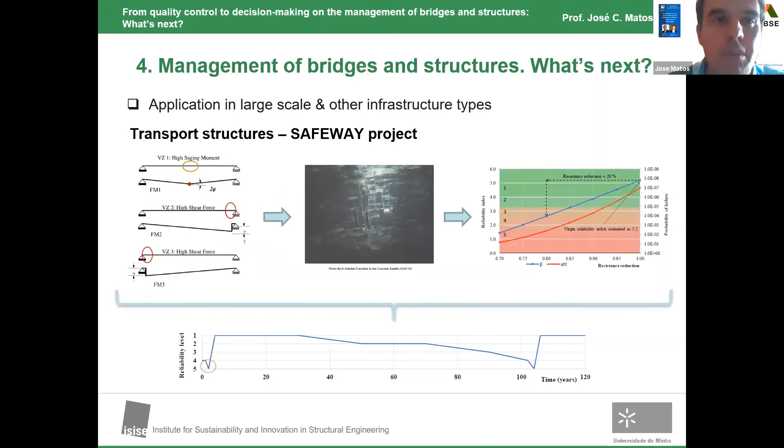And if you do it for all these bridges in a very simplified manner, then we can implement the quality control procedure that I spoke before, but in a very general way.

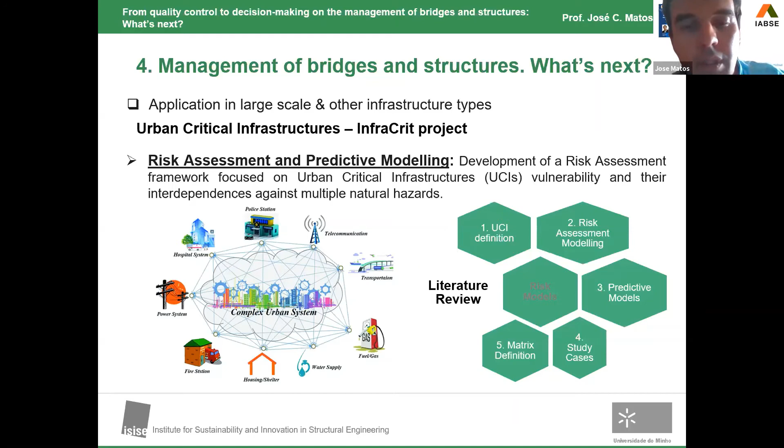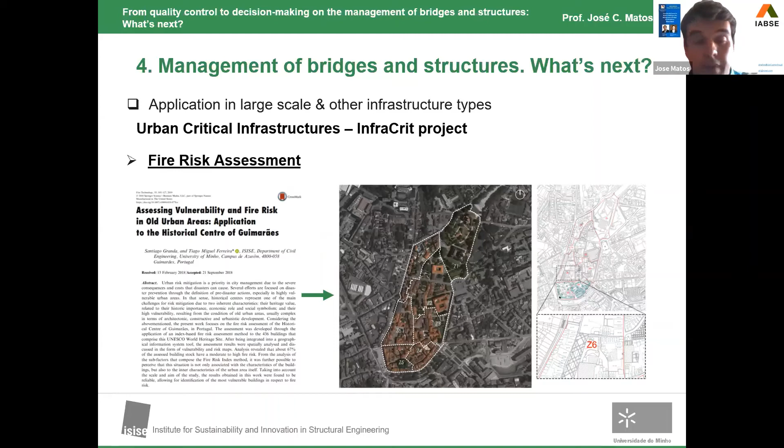To finalize, we can also extend this framework to other kinds of infrastructure types. This is an example of urban systems where we have telecommunication infrastructures, power systems, and many other infrastructures, not only transportation infrastructures. The problem here is a problem of scale. In this case, we combined an extreme event, which was fire risk assessment in the historical center, with a damage modeling of each infrastructure element that takes part of this scale of analysis.

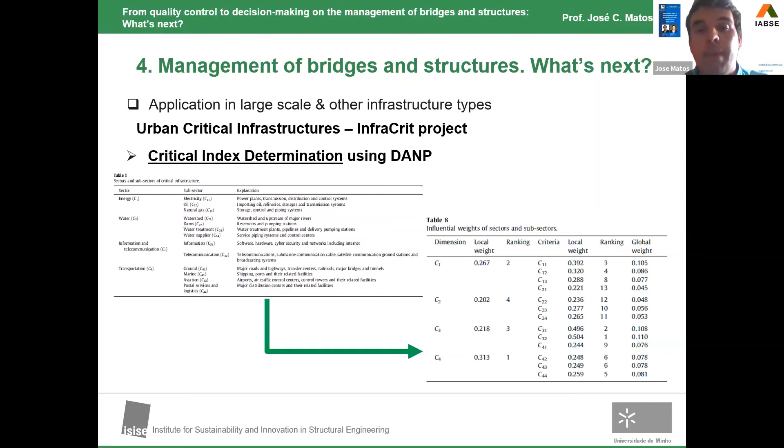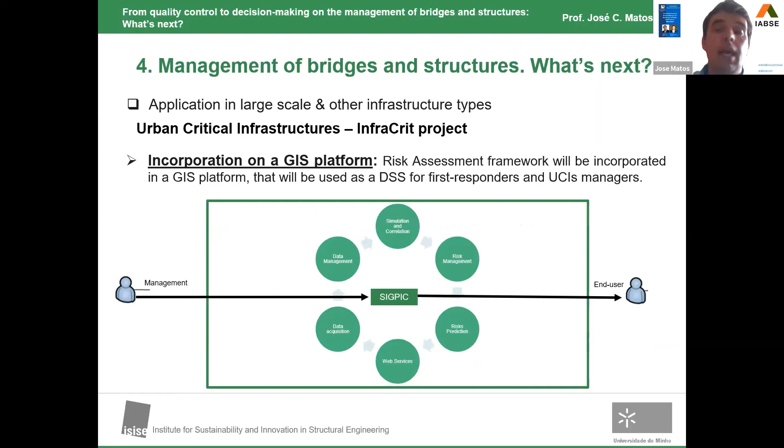And then we need to identify what we call the critical index determination using two procedures, one more qualitative and one more quantitative. Based on this critical index determination, we can then take better decisions on a large scale analysis. Of course, when we speak of a large scale analysis, we need to integrate this in a GIS platform. This is a need, and this is what we did in the past.

And to finalize, this is another project that we just started where we are going to implement not the management of transportation infrastructure, but the quality control procedure and management of what we call port or harbor infrastructures, which is the GIIP project. And we are combining this also with extreme events, in this case storms, wind storms, sea storms, and so on.

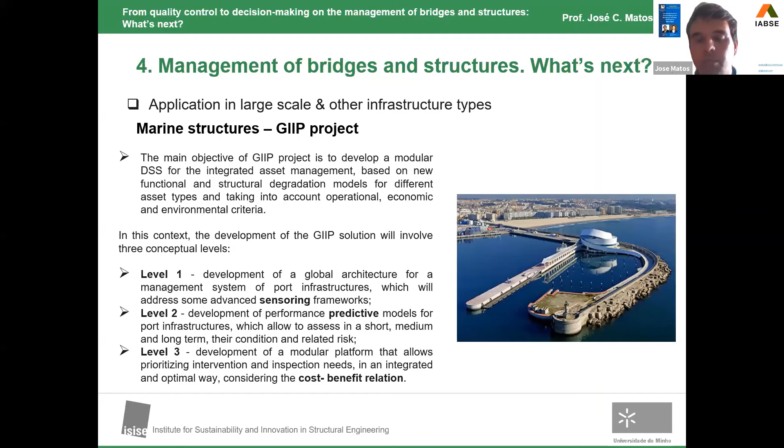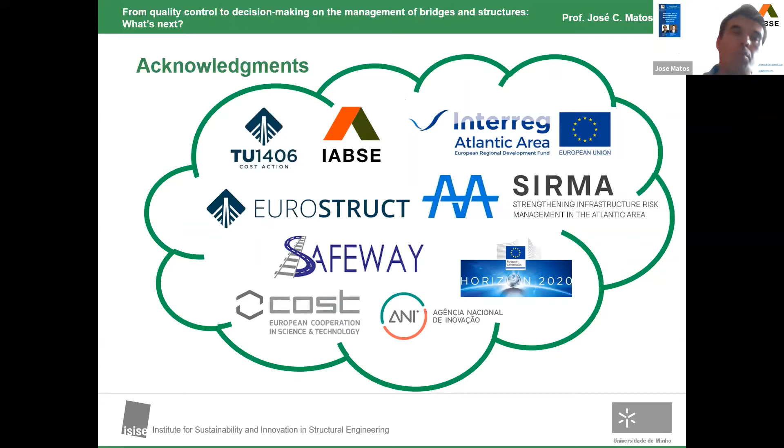So thank you very much for your attention. I'm now open to any question, and I want to acknowledge all these projects and all that contributed to this talk today. Thank you very much.